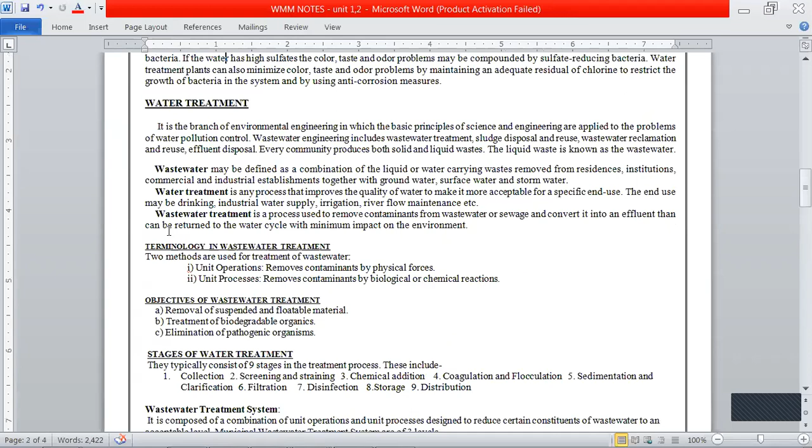Yeah, iron and manganese. So I think you have this topic. So this one.

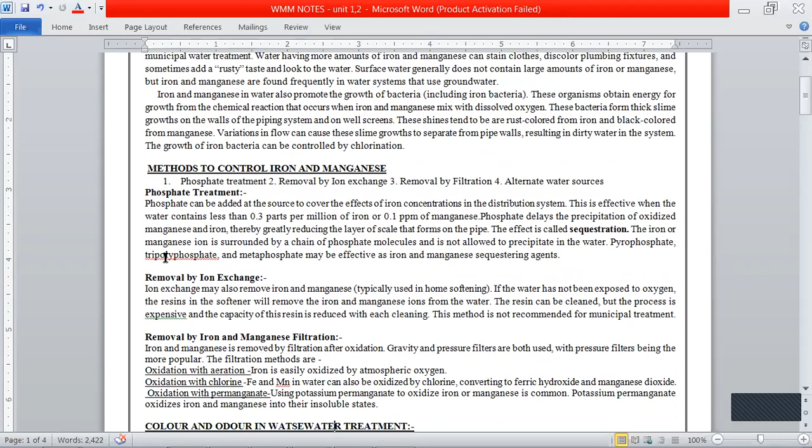So these are the things to be done. Methods to control: phosphate treatment, removal by ion exchange, removal by filtration method, alternate water resource method. So phosphate treatment gurinchi cheppukundam. Phosphates are added to the source to cover the effects of iron concentrations in the distribution system. Next, removal by ion exchange.

Ion exchange may also remove the iron and manganese, typically used in home softening. If the water has not been exposed to oxygen, the resins in the softener will remove the iron and manganese ions from the water. The resin can be cleaned, but the process is expensive and the capacity of this resin is reduced with each cleaning. This method is not recommended for municipal treatment. Why? Because of the cost considerations. So the phosphate treatment can be used for control of iron and manganese.

Next, removal of iron and manganese by filtration method, right? This is removed by filtration after oxidation. Oxidation process ayina tarvata filtration process dwara we can remove the iron and manganese. Gravity and pressure filters are both used, with the pressure filters being more popular. But majority we are using pressure filters.

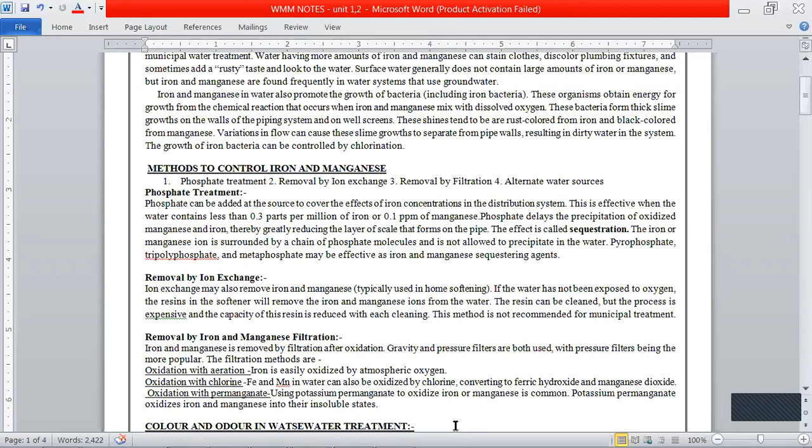So these are the three things for removal by the filtration process. So these are the topics we discussed in unit 2. Next, color and odor in the wastewater treatment.

Surface water or groundwater may become contaminated by pollutants such as gasoline, industrial solvents, or a wide variety of volatile organics. Chemicals that can create odor, smell, or taste in water include phenols, xylene, formaldehyde, refinery hydrocarbons, etc.

Sewers collect the municipal wastewater from homes, business sources, and industries, and deliver it to a facility for treatment before it is discharged to water bodies or land, or reused. The sewer pipes collect the wastewater from houses, business areas, apartments, and residential areas, sending it to the treatment plant before being discharged.

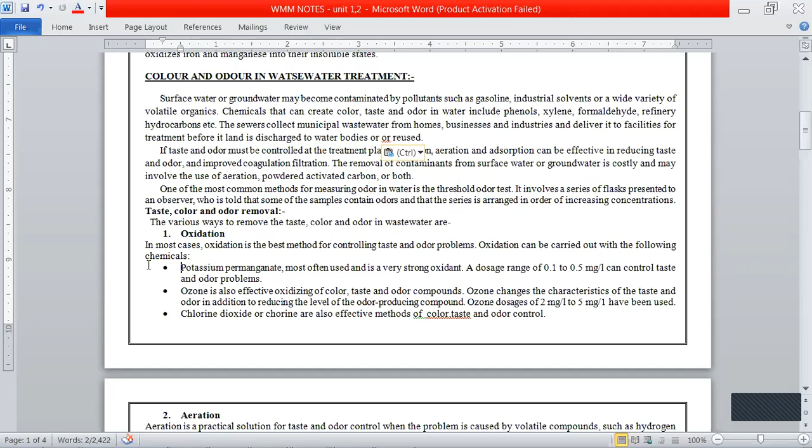Taste, color, and odor removal - the various ways to remove taste, odor, and color in wastewater are: first, the oxidation method; second, the aeration method; third, the adsorption method; fourth, the distribution method. Oxidation, in most cases, is the best method for controlling taste and odor problems.

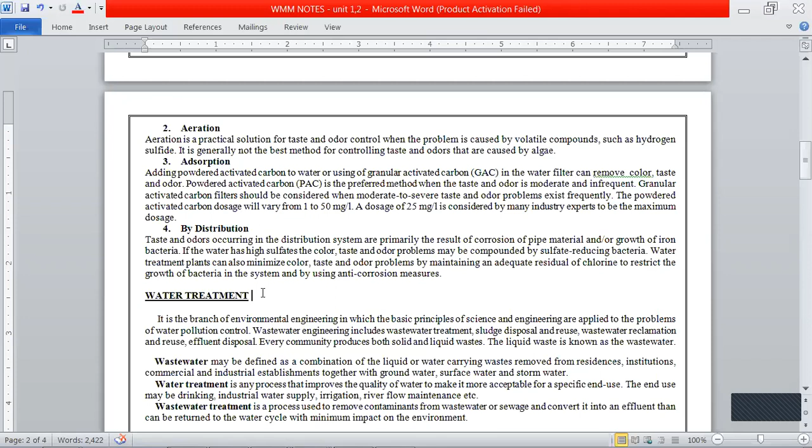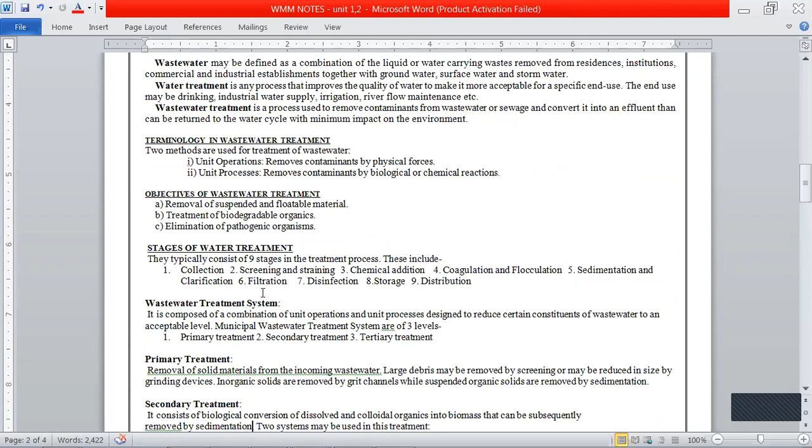So these are the four methods to remove color, odor, and smell in water. We have already discussed what water treatment is, and the meaning of wastewater treatment. So the technology of primary and secondary treatment is already known to you.

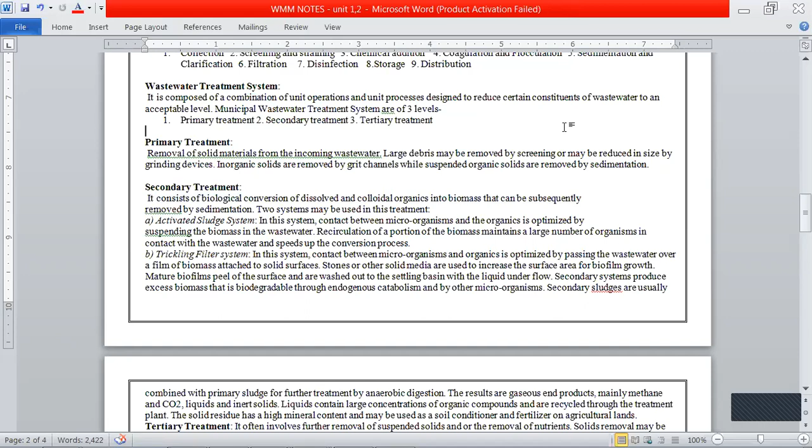So the time is completing. So is there anything to discuss?

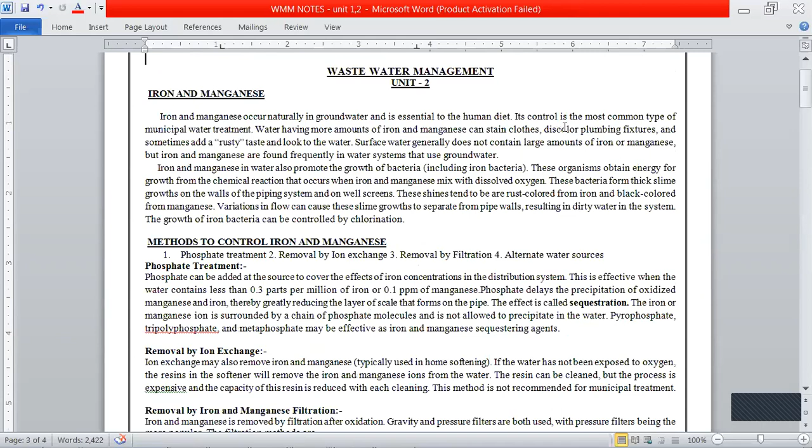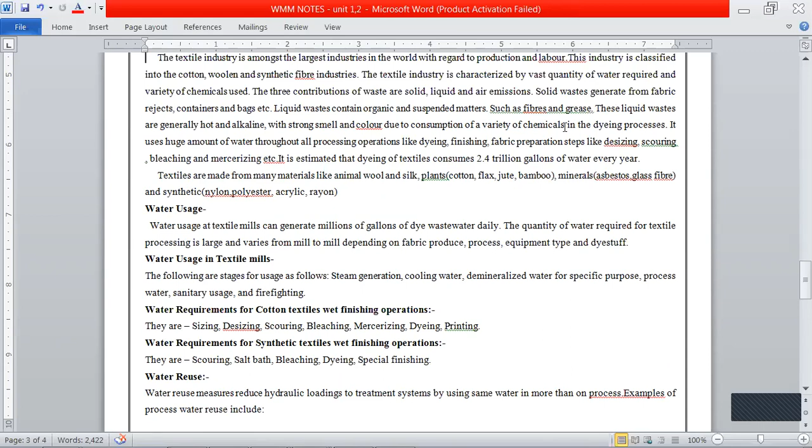Hope everything is fine. Once corona started, I posted all the information of wastewater management to Hitendra sir. I think they have given it to you. If not, I will provide you. Don't worry, okay, we'll see other things.

So use of municipal wastewater is completed. And the removal of color and odor is completed. Removal of iron and manganese is completed. Adsorption method, advanced methods, adsorption is completed. Ion exchange, reverse osmosis process, freezing, filtration. We will discuss these topics in the next class.

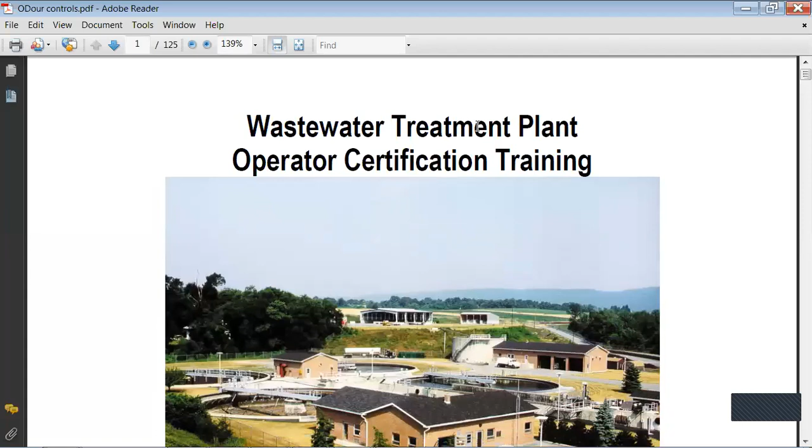I think the screen is shared. So these are the operator certifications. See the treatment plant in other country. See the treatment plant, some these are all ground mounted. Some are high raised water tanks. In every village, in every municipality, everywhere we see high raised big tanks. These are underground. Right, yes.

I think the screen is not visible. Huh? It is visible now, can you see it now? Okay.

So just only see the rough things. I'm not showing you all the things.

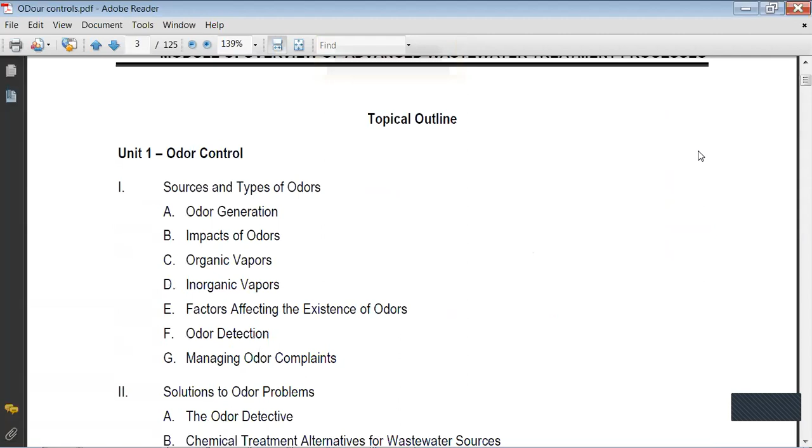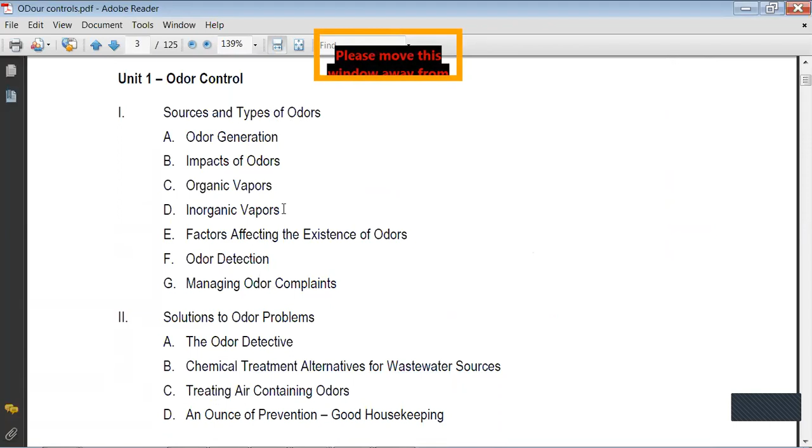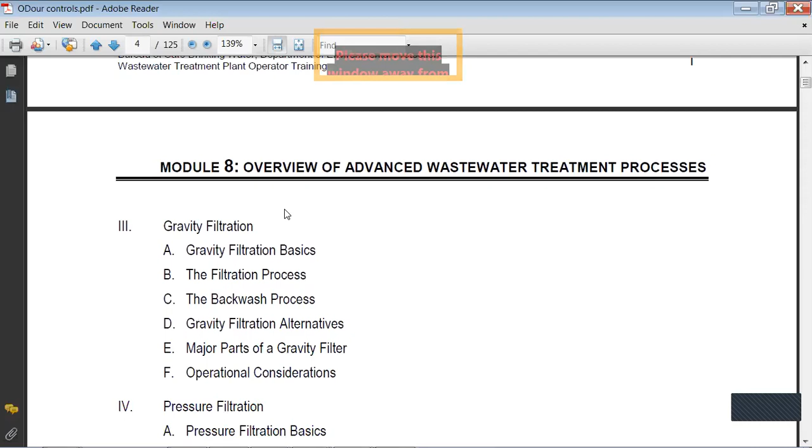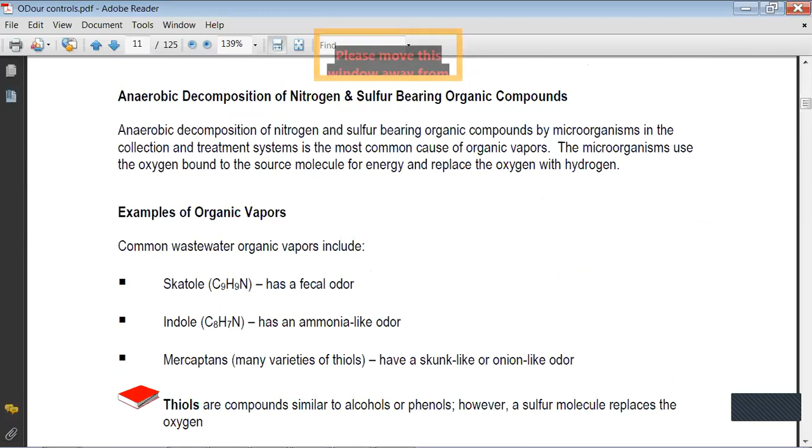Types of odors you are having: odor generation, organic vapors, inorganic vapors. These are all the smell. So if you visit any industrial area, water-based industries area, at that place you can see some sort of toxic smell, an unbearable smell comes, right? So these are all the additional topics which is not in your syllabus, but just showing the details of it. Okay, so no issues.

I think the screen is shared. So regarding reverse osmosis, we discussed why reverse osmosis is important for purification of water, right? So why RO is the best thing.

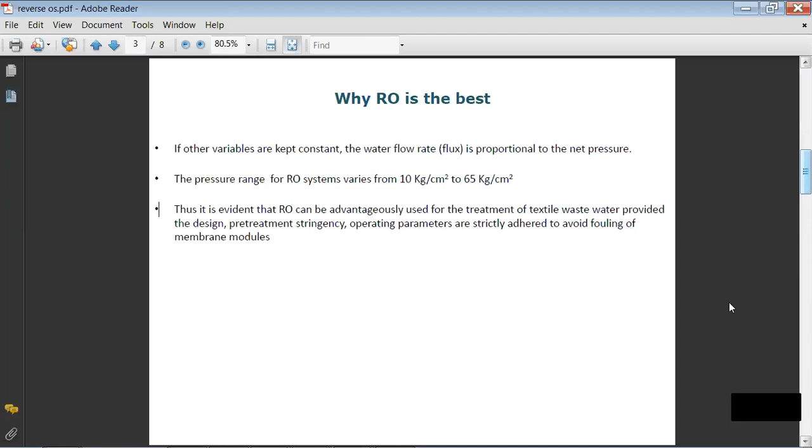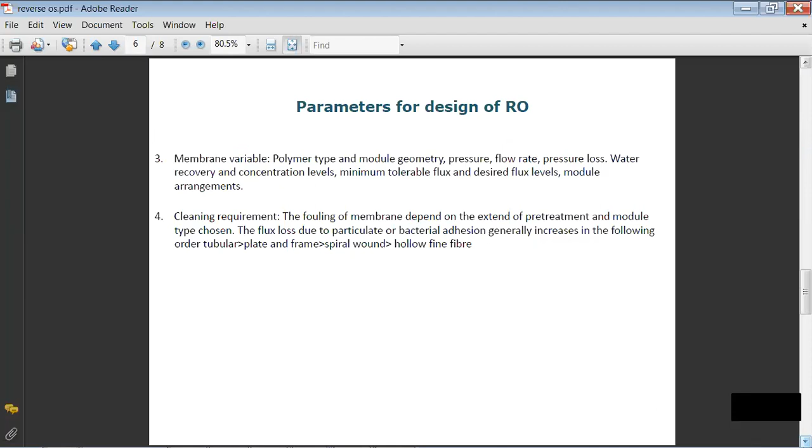So we'll discuss in the evening class. Don't worry, I will discuss in the evening class. What are the applications of RO? How is the designing criteria of RO treatment done? What are the parameters for designing the RO? Right? Design speciality. So we'll discuss these things in the next class, that may be in the evening session, right?

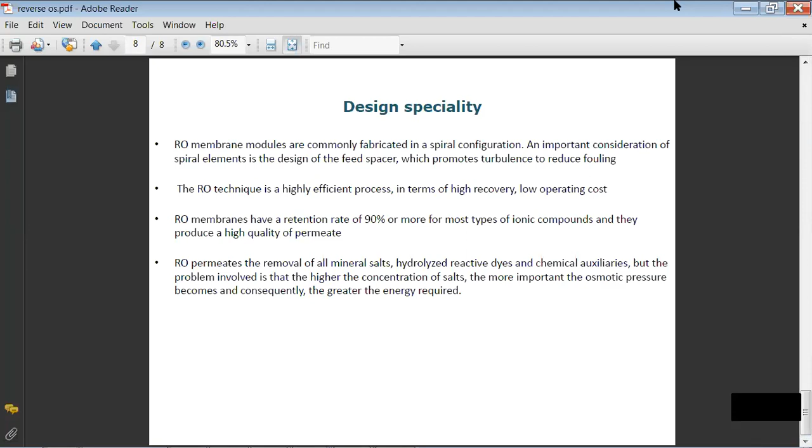So in the evening session, we are having very few topics to discuss: the osmosis process, the filtration, freezing process, and also the advanced water treatment. So with this, we can complete unit 2 also.

So I think once again, check your notes. What are the topics discussed in the class and what are the material given to you? Okay, so just these are the topics only briefing the units, that's all. Separate classes we are not taking. So these are the briefing sessions, just briefing sessions, so that you can recollect your information, what we have studied, what we have discussed in the class.